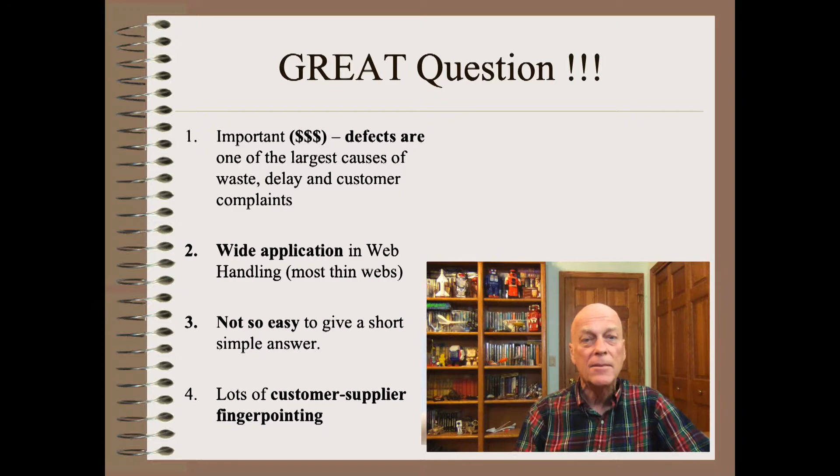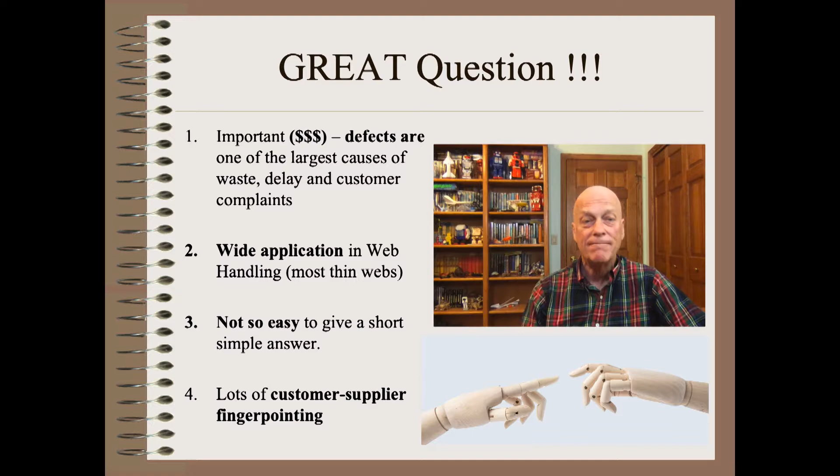This is a great question, as are all clips in this series. What makes a great question? First, web and winding defects of all types, and there are hundreds of common types, are usually in the top 3 causes of waste, delay, and customer complaints in most plants. Second, web handling is essential economics in web-to-roll, roll-to-roll, and roll-to-sheet plants. Third, it is not so easy to give a short, simple answer, but I will try my best here. Finally, as with any others in this series of questions, we have lots of customer-supplier finger-pointing, and this leads to confusion, frustration, and delay. So let's get started.

This clip is the final in a short series, so it would be more meaningful to see the first two, if you have not already done so.

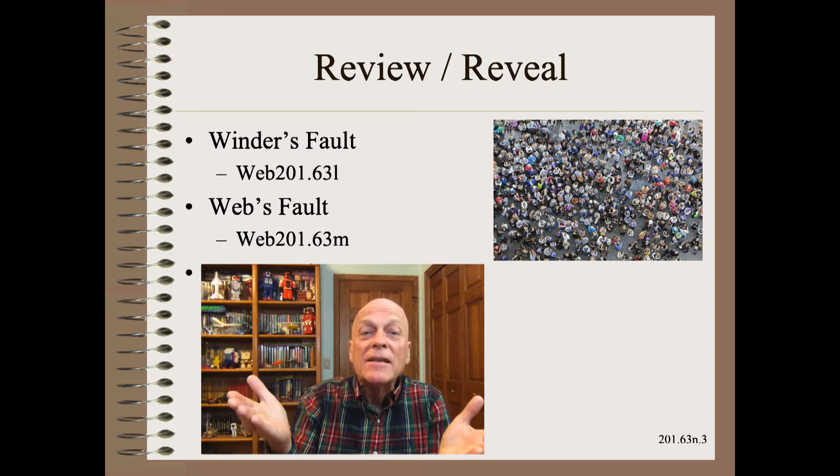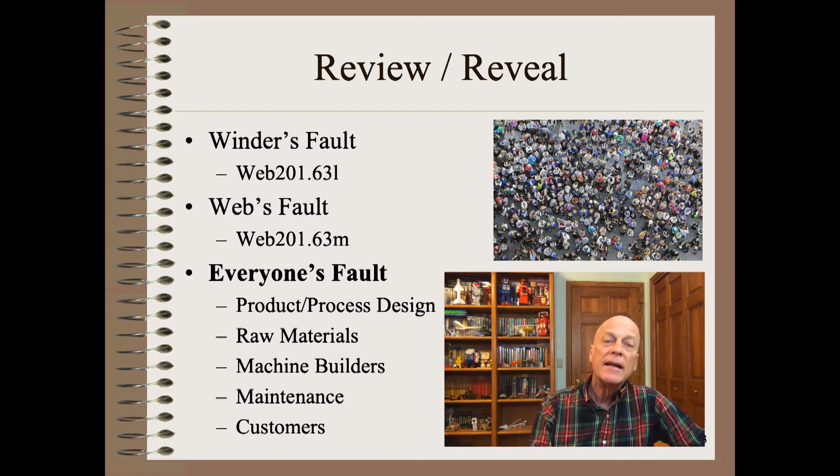So now is the time you have all been waiting for. The simple answer to questions like this is, it's everyone's fault! I don't mean this to be polite or politically correct or to be fair and balanced. It is literally true for many, if not most, defects, as we will see in the next half dozen illustrative examples.

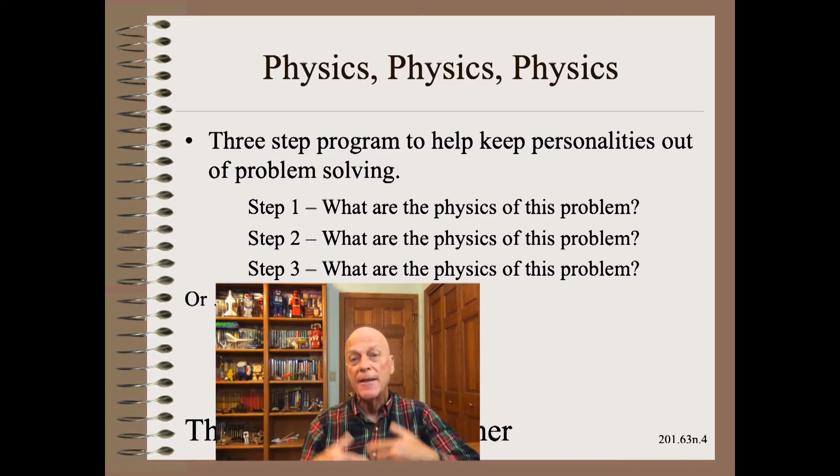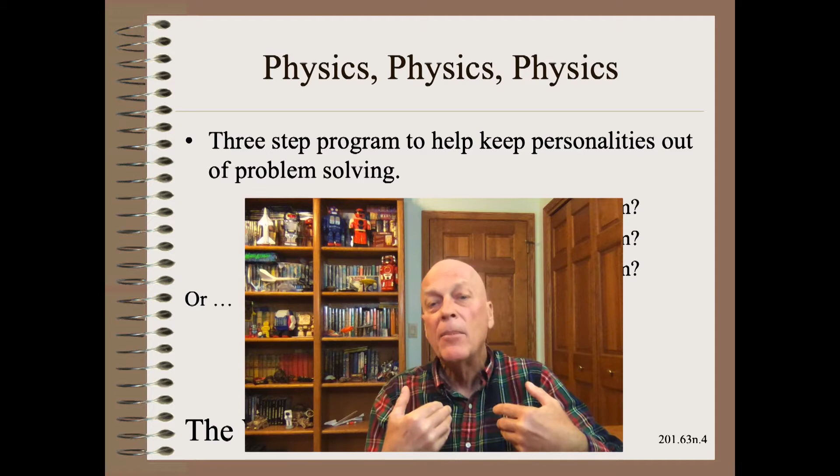It can be difficult, sometimes dauntingly difficult, to keep personalities and politics and finger-pointing out of problem solving. One way I've found that helps is to focus on the facts and the physics first. More specifically, find out what are the influential factors suggested by the physics of the problem. These are often quite easy to list if you consult one of the many sources on common defects, such as the Roll and Web Defect Encyclopedia. Or, as I often have to do when I am called into multi-party disputes, treat the web as my customer, no matter who called me in and no matter who is paying my bill.

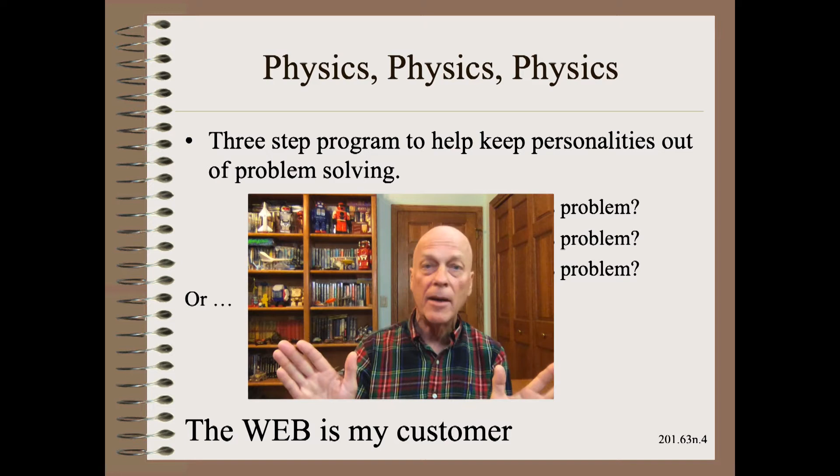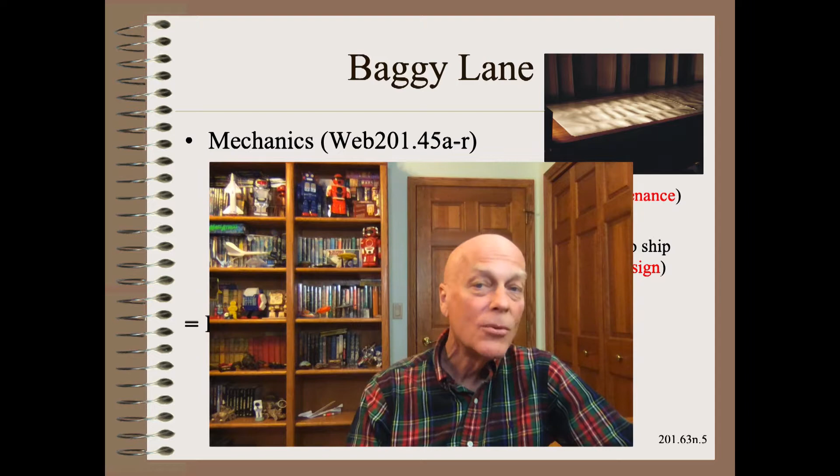Let us begin with the most common defect, the baggy lane. I have written countless publications on this subject, including a 24-clip series, Web201.45a through R. There are many others that you can study on your own.

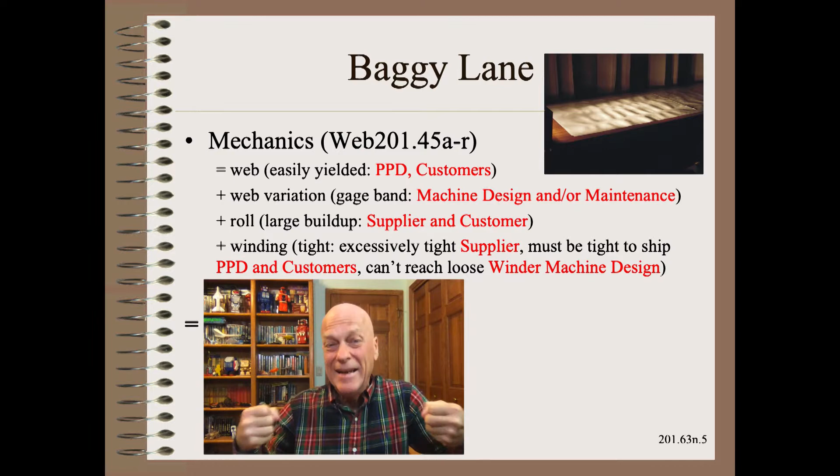The major physics are a web chosen by the product developers and customer that is easily yielded, plus a web profile that builds up as the roll is wound and is made worse by winding tightness. As you can see, everyone from the product process developer to the customer and everyone in between is at fault, in the sense that troubles were a direct result of the choices that were made.

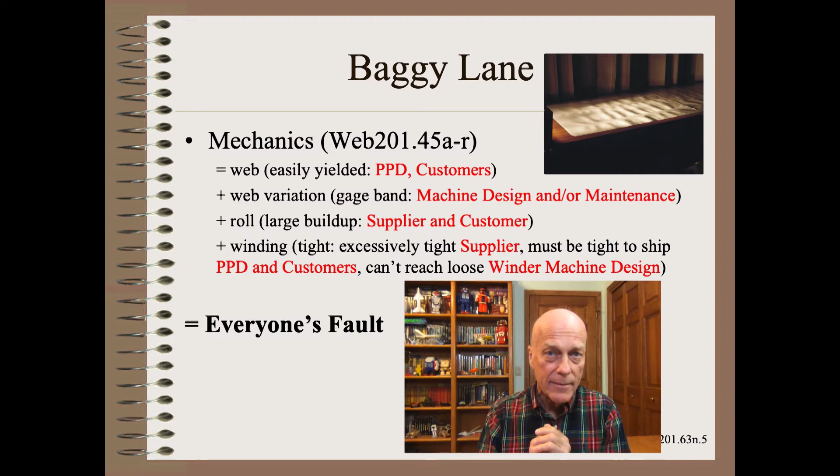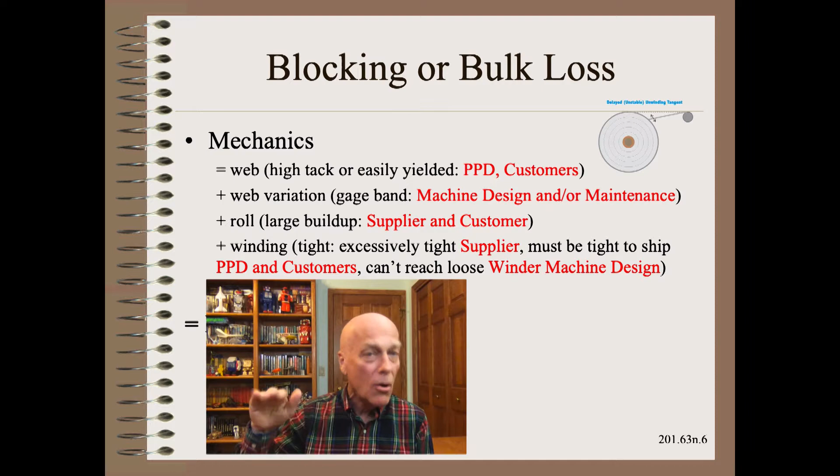Since blocking and bulk loss are also tight defects, just as baggy webs are, it should be no surprise to find out that nearly every factor is either precisely the same or quite similar. As you can see, everyone from the product process developer to the customer and everyone in between is at fault, in the sense that troubles were a direct result of the choices that were made.

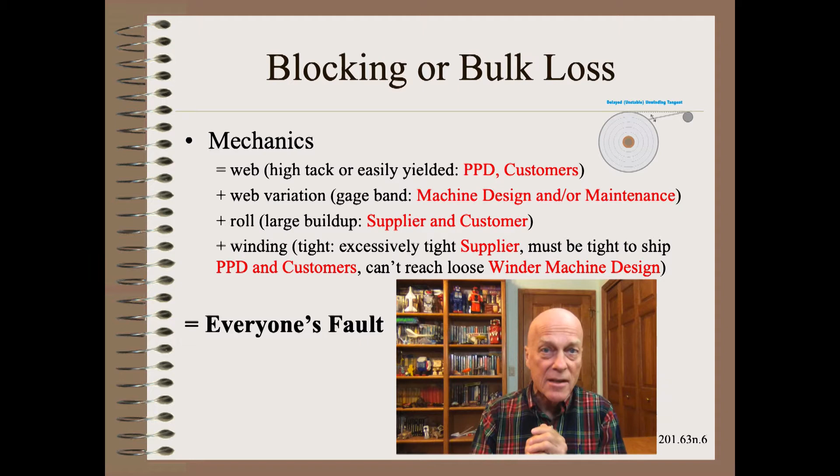There are at least 3 totally different types of core crush, but we will focus on the most common one here. You can learn more about this and other common defects in my award-winning and trademarked Web101 school.

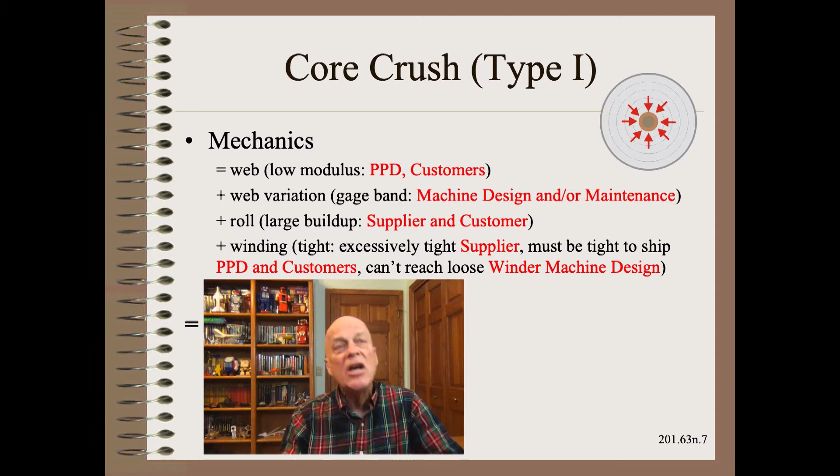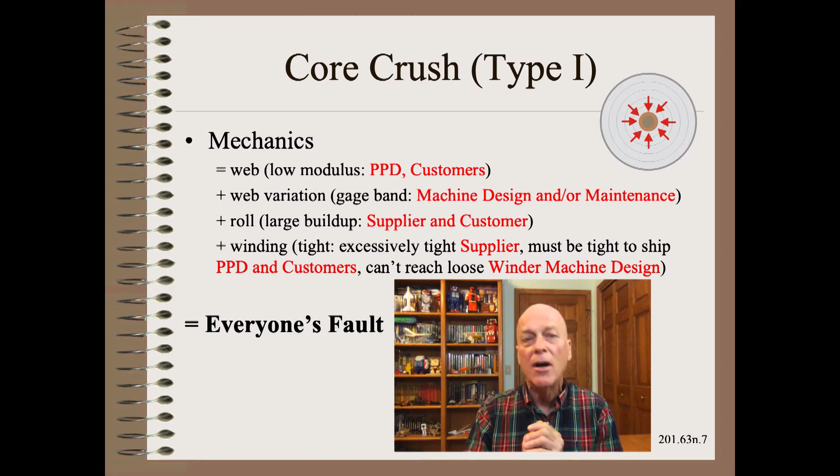Since type 1 core crush is also a tight defect like the previous 3, it should not be a surprise to find that nearly every factor is precisely the same or quite similar. As you can see, everyone from the product process developer to the customer and everyone in between is at fault, in the sense that troubles were a direct result of the choices that were made.

Okay, now let's do something quite different than a tight defect. There are at least 3 totally different types of curl. One comes from asymmetric manufacturing and another comes from asymmetric converting, such as laminating.

Here, we will focus on roll set curl. The major factors here are defined by the physics and are mostly product process design choices related to geometry, such as web thickness and core diameter. Winding tightness has only a very, very tiny influence with this defect, so it is probably a distraction to even list it here.

As you can see, everyone from the product process developer to the customer and everyone in between is at fault, in the sense that troubles were a direct result of the choices that were made.

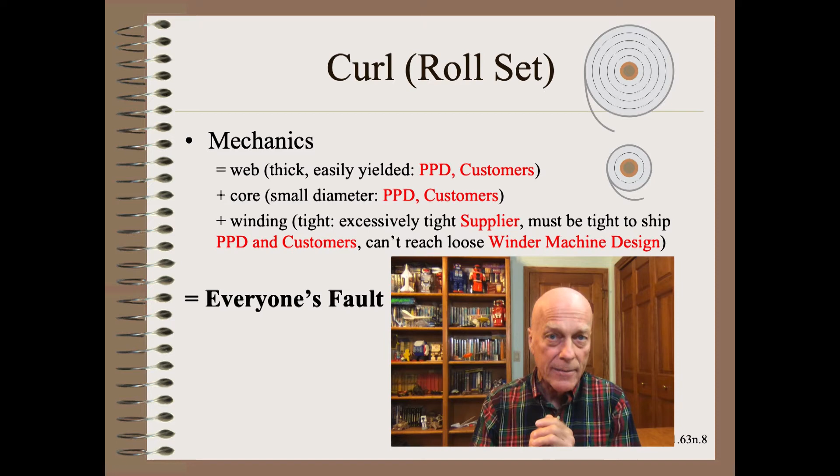Okay, again, let's do another totally different type of defect. There are at least 5 totally different types of telescoping. We will deal with the 2 most common ones here. If you don't know how to tell one telescope from another, I would suggest you literally go to school.

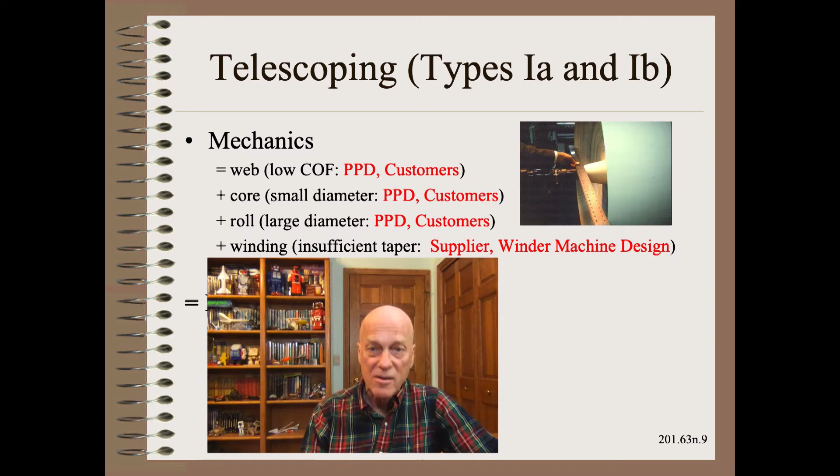The major factors for type 1A and 1B are defined by the physics and are mostly product design choices related to web coefficient of friction properties and geometries such as core and roll diameter. In this case, however, winding tightness, or more specifically tapered tension, is as strong as the other factors and thus deserves strong attention.

As you can see, everyone from the product process developer to the customer and everyone in between is at fault, in the sense that troubles were a direct result of the choices that were made.

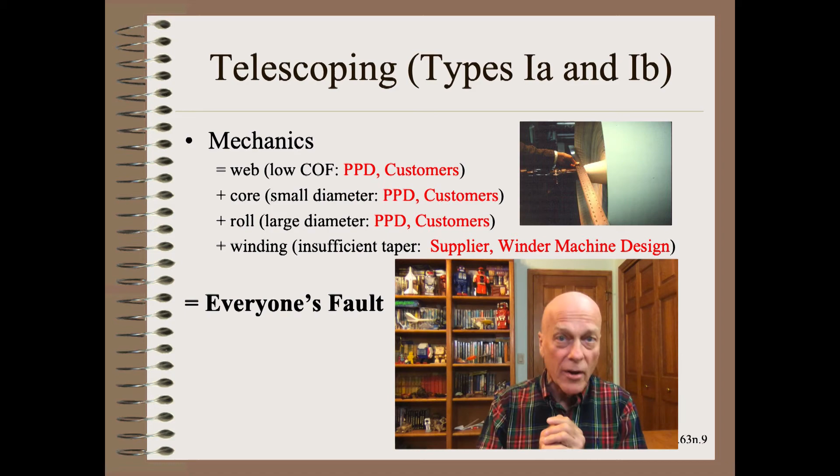So, getting started with defects is actually quite easy, especially if you could stay away from politics and finger pointing. First, you need to do your homework on the major case and subcase of the specific defect you are working on. As I've said hundreds of times before, a wrinkle is not a wrinkle is not a wrinkle. There are about 20 different kinds, each with their own remedy list.

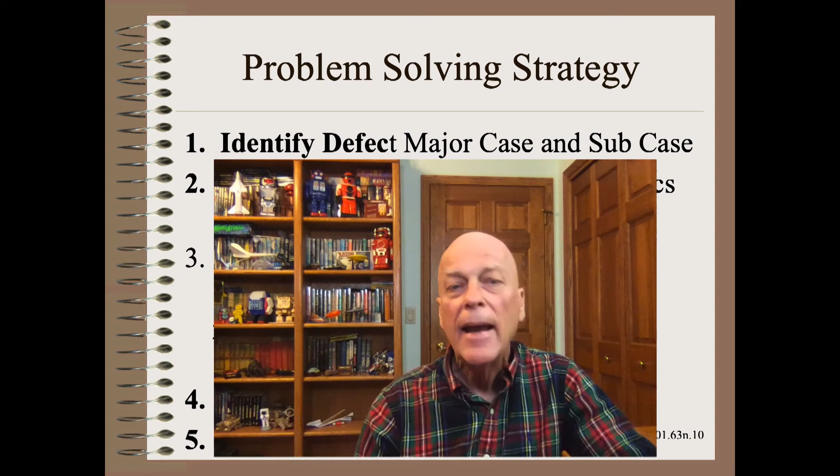As seen in this class, there are 3 totally different types of core crush, 3 totally different types of curl, and a half-dozen telescopes. The second step is also usually quite easy: list the major factors suggested by the mechanics and the physics of that very specific defect you're working on. This is usually quite easy, as publications cover most of the defects you will ever work on.

The third step is slightly more difficult, and that requires a deeper understanding of the specific defect and the environment in which those defects occur.

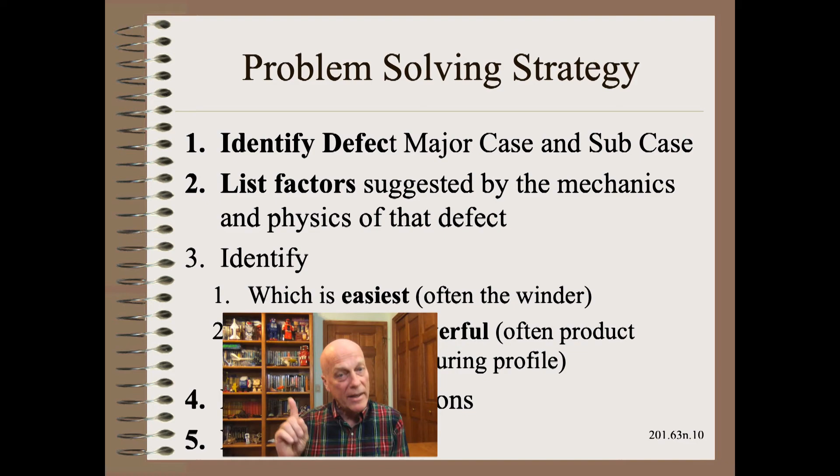Some factors, such as adjusting winder TNT settings, tend to be easier and thus would be a place to begin. However, it could be totally naive to think that you can make all your problems go away by merely playing with the winder knobs and the winder curves and the winder taper.

Sometimes, as we saw in Roll Set Curl, the winder has almost no role whatsoever. More often, the winder can influence frequency and severity a little bit, but may not have the authority or the power to remedy the problem well enough to everyone's satisfaction. Then we may be forced to consider even stronger factors which involve product process design or manufacturing profile.

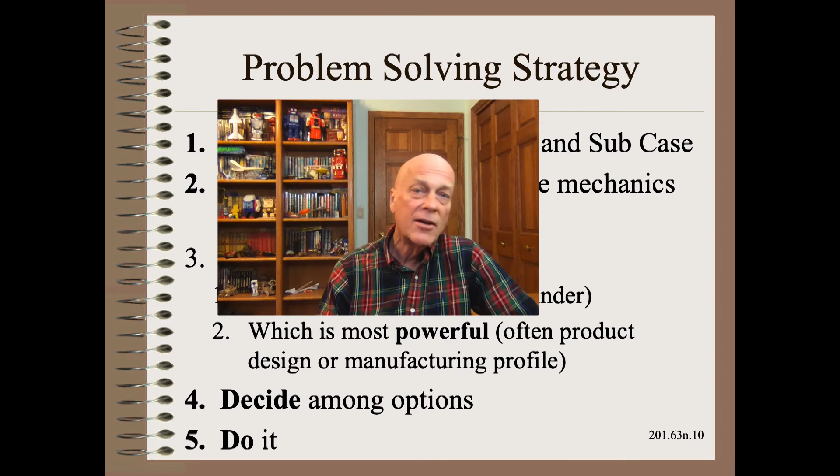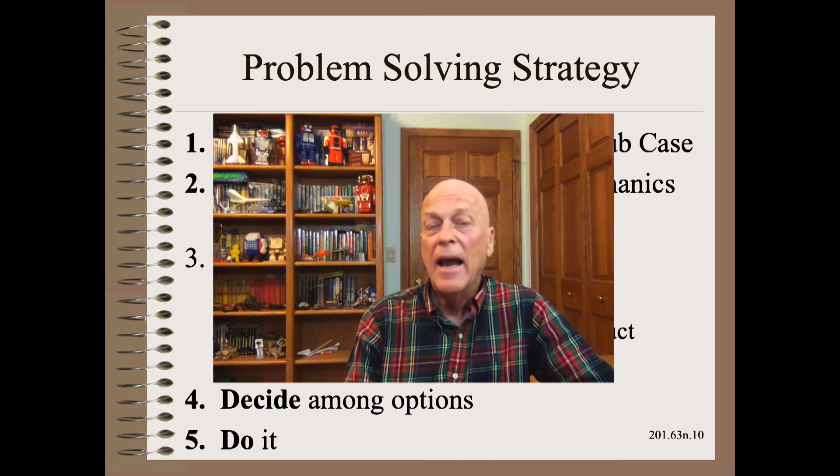Finally, pick a remedy option or options using any of the economics-based techniques and then just do it.